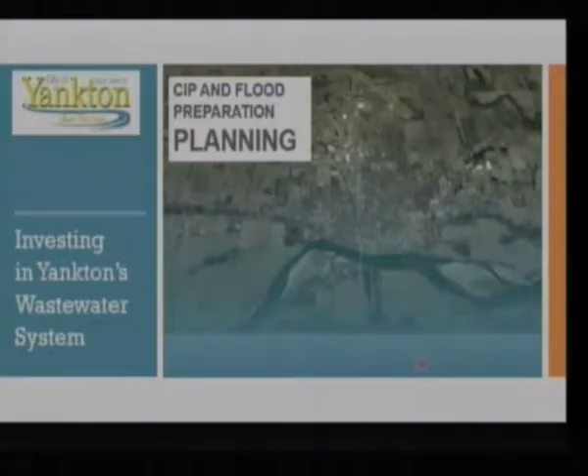Just a little bit about what the condition assessment was, the overview, the process, and some of our findings and recommendations. Again, we're not fully done with the condition assessment yet. We're still working through that. But we moved into more of a preliminary engineering phase for the EDA application.

Key staff, myself, we also have Tanner Hansen here tonight. Then with HDR, we have Nick Van Wy here. And then Delron Peters and Dan Graber have been the main two working with us on the process and going through the condition assessment. The other engineers are specific to certain areas, whether it's electrical and structural and things like that.

Key issues that we've been seeing at the wastewater plant, the main one is aging infrastructure and declining reliability with our system. We did make it through the March flood fairly well. We didn't have a lot of damage, but it did open our eyes to a lot of areas where we need to make some improvements.

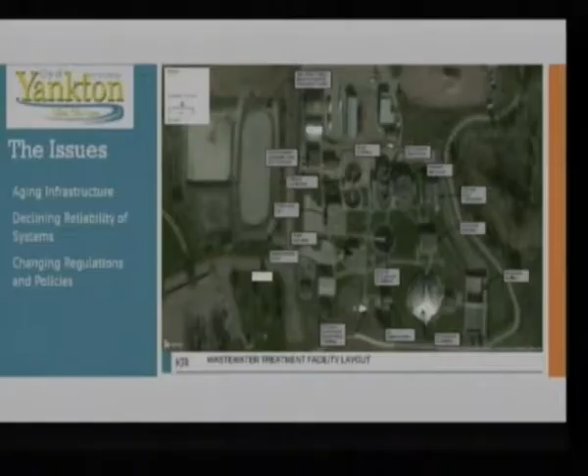And also, anytime you're looking at improvements, you're looking at those future regulations and policies that'll be coming down in the future. The process is evaluate our goals, objectives, evaluate the information, set some priorities, look at alternatives and options, and really come up with a plan.

And that's kind of where we're at in the process right now. We've gotten the basic information. Now we're starting to put together a plan.

When you look at prioritizing issues, the biggest one is what keeps Tanner up at night. I sleep just fine because I know I've got Tanner to answer his phone. But that's what keeps the guys up at night, and those issues that are always in the back of our mind. And performance, we're always looking at ways that we can optimize our performance to save money in the long term.

Being proactive, maintaining a good maintenance program so that these facilities are resilient. And one of the things we're seeing more of, as people retire and take a lot of this information with them, we need to do a better job of planning and getting that information documented and developing some standard operating procedures to deal with them in the future.

What's really driving these capital improvements? Again, the regulatory requirements are always in the back of our mind. Flows, loads, capacity, looking at where our system is in terms of capacity. And then the facility's age and condition, and that's still the biggest one.

Process equipment is probably the biggest one where we're having some issues. We do have some structural issues with a few of the buildings. We have some electrical issues that we think we can add some resiliency to our system. And of course, we're always looking at safety issues.

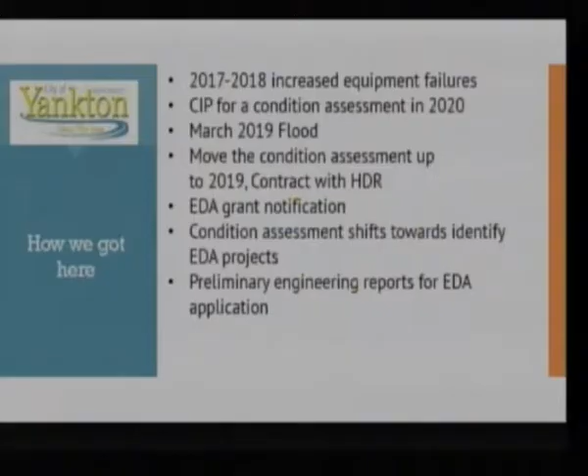Main reason was to address some of the issues we had at the plant and to be ready for the future funding options that were going to come out, mainly the EDA. Here probably a couple months ago, we got notification of that EDA grant. And then when that came out, our condition assessment really shifted towards identifying EDA projects.

What came out of that then is preliminary engineering reports to be put into the EDA application. The application for the EDA is really looking at projects that add resiliency to your system, so that when natural disasters hit, your system can withstand those, handle those, and you don't have as many issues. So that's kind of where we got to today, and that led into the projects here. We've got about 16 projects that we're looking at right now.

First one here is to replace the electrical main gear. This is basically our electrical gear that switches during our power switches. So if we lose power to the plant, the electrical gear has to switch over to the secondary power supply. We've had some issues with this. We had a brownout one time because the transfer switch did not work properly. A brownout is when you lose basically one phase of your power, and that causes more damage within the plant. This, I believe, was originally installed in 2000. The switchgear is actually from 1980, so again it's beyond its lifespan, and we're looking at some options to improve that. We've got an estimated project cost of about $700,000. Again, these are preliminary costs from preliminary engineering reports, so we'll continue to update those as we move forward with EDA.

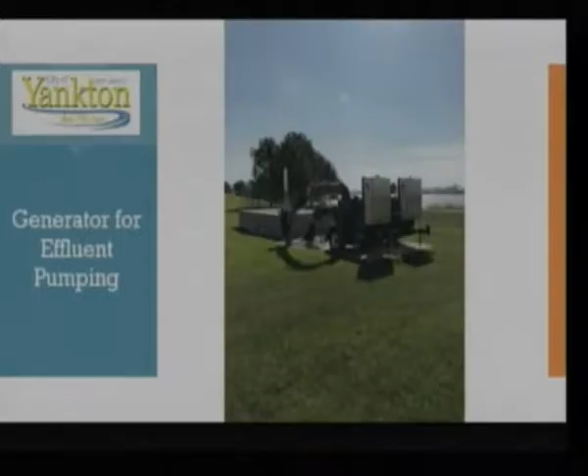Next one, if you remember, on our last EDA project we put in some effluent pumps. For several years we've had a generator in the budget. We haven't purchased it, it's always one of those things that gets pushed. Through this, we'll apply for a generator to power these pumps. If we were to lose both power supplies to the plant, this would allow us to run a generator to pump the flow away from the facility and prevent damage to the main infrastructure in the plant. The generator would also be able to be used at other locations, including the booster stations and Nebraska wells. Again, estimated project cost of roughly $521,000.

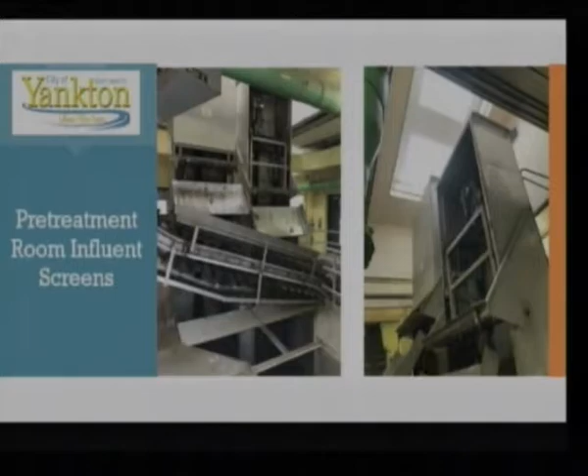Pre-treatment room influent screens. This is the screening mechanism for the initial flow into the facility. We've had a lot of issues with our pre-treatment building, so we're looking at making some improvements to that. It's one of the first things that showed up on the condition assessment in terms of needing repairs. The cost for improving that screening system is about $530,000.

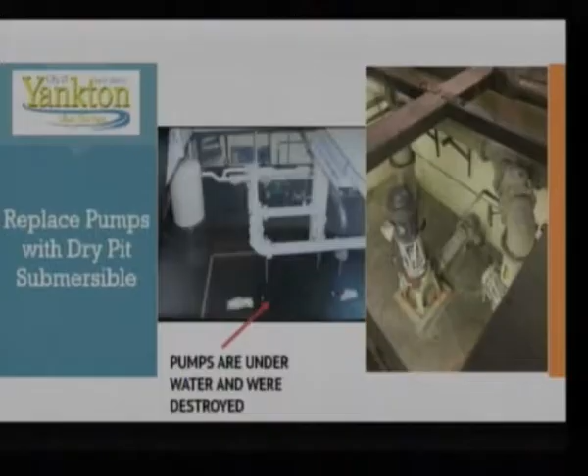What we're looking at is replacing those pumps. Again, they're 20 years old, they're at their life expectancy, with what they call a dry pit submersible. It's a pump that's designed to be underwater. It'll run in a dry pit, but it could actually run submerged underwater. So if we lose that facility again and have that flooding, we don't lose the motor. You simply get it pumped out, flip it back on, and it runs. So it adds a lot of resiliency to your system, and you're not down near as long as you would be with our current infrastructure. Again, estimated cost to replace those 3 pumps, including removing some of the electrical that's down below and moving it up to an upper level so it won't be flooded, is around $456,000.

This is kind of a newer one for Tanner and I, the electronic operation and maintenance manual. Currently, we do everything through Excel files for recording our maintenance and operations. This will really be the first step in getting our plant into an asset management style system. It gives us a better way to track our maintenance, track our costs, and determine where we're spending money in maintenance and operations and where we can save that money.

That's looking around $250,000. This one, like I said, is a little bit newer to Tanner and I. We haven't had a lot of discussion with HDR, but it's definitely one that we're interested in.

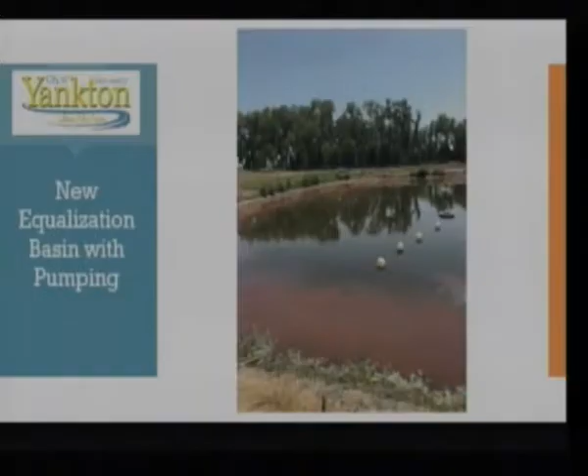New equalization basin with pumping. Right now, when we hit our peak demand, we basically have to force the water through the system, and it overloads us hydraulically and causes us issues. What we're looking at is basically adding a basin out in Paddle Wheel Point, in the same area as our sludge lagoons. What this allows us to do is basically have roughly 1 million gallons of empty space to divert water to during these major events.

This last event, I'm not sure if that would have been enough, because we figured we bypassed roughly 3 million gallons during that event. But for a lot of events, we would be able to equalize, send some of that flow over to our equalization basin, and then bring it back at a later time.

It also helps during our day-to-day operation. Currently, right now, we have real high peaks during the day and real lows at night. So on a daily basis, we could actually send some of our flow during our peak hours over to the equalization basin and then bring it back through the night. When you're working with a biological system, the more even keel you can keep everything, the better it is for the bug life, and the better your system works.

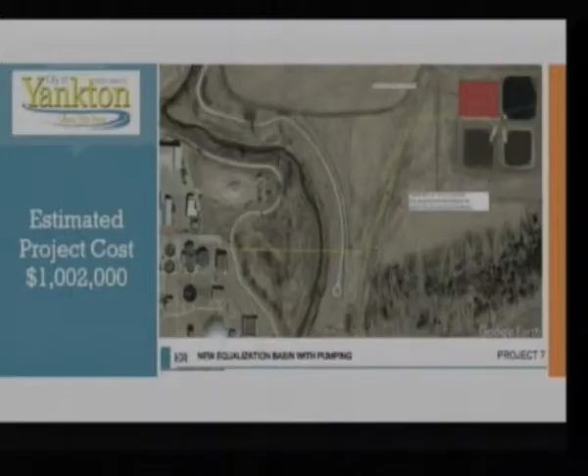Roughly $1 million. We looked at potentially using the area where the lime lagoons were at, but decided it'd probably be better to move it over towards Paddle Wheel Point. Adds some cost, but in the long run, I think that's a better location for it.

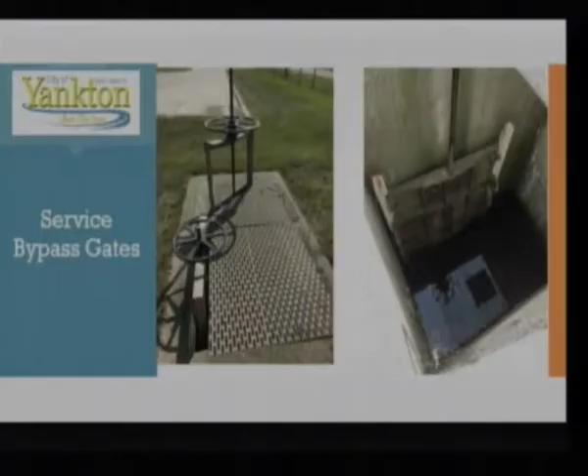Service bypass gates. One of the things we realized during this last event is a lot of our bypass systems are not up to where they should be. We've bypassed off the primary treatment several times, but we've learned that our bypassing system right at the Influent building isn't really operational.

We need this, again, for events, but we also need it as we move into doing some projects within the facility when you're going to be taking buildings out of commission to do repairs and things. We're going to need that ability to bypass. So we want to come in and basically overhaul our bypass system, our bypass gates, and get everything up and working, so as we move into future projects, we'll have that system working properly.

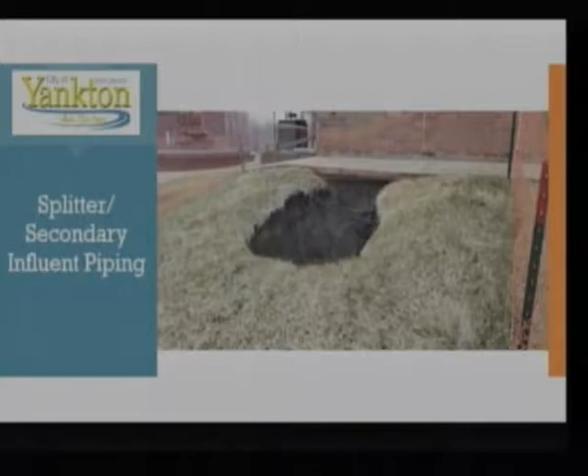We got a preliminary cost of $1.4 million, but this also includes some other issues we found out during the project. As that sinkhole and the material disappeared, it also took all the other pipes that go into that building settled. So all the pipes that are coming into the building now are coming in at really funny angles and are putting a lot of pressure on the piping system within the building.

So when we have it excavated to redo that 36-inch pipe below, we're also going to be doing work on all the other pipes to bring them up so they're level and we're not putting that pressure on the piping on the inside of the building.

So we're also looking at, since we're going to have everything down, all the bypass pumping in place, there's a wet well in the basement there that, since we're going to have it out of service, we'll be doing a new coating in that wet well to prolong its life. Again, some of this project may be FEMA, some of it may not, we're not sure yet.

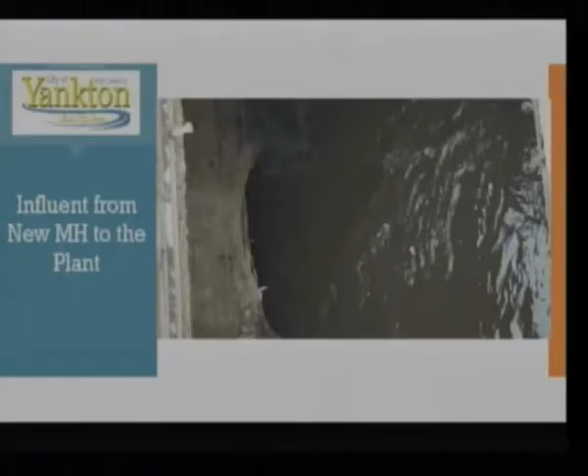This is the influent pipe from the new manhole to the plant. If you remember, during the force main project, we installed a new manhole by the street shop. A year later, we had a failure in the manhole on 2nd Street, up in the intersection. We replaced that manhole with 2 new manholes and piping out into 2nd Street.

This again is an arched concrete pipe that we've had failures on in the past, with the manholes too. So part of this project, we'd replace the pipe going from just north of the street shop all the way down to the inlet building at the wastewater facility. That's kind of where we're at with that one. Estimated cost of $1 million. Again, it's a project that will add to that resiliency for the future.

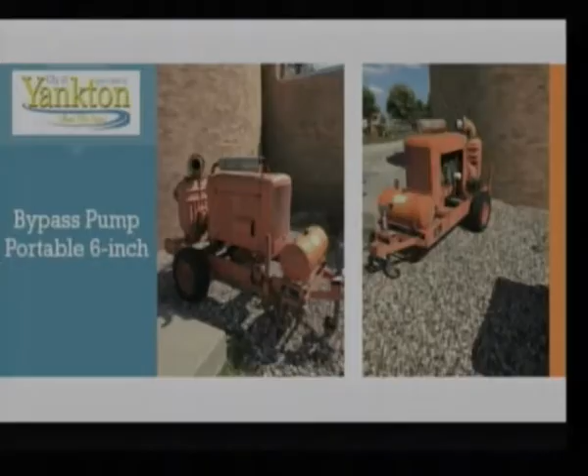Our bypass pump, this is something we're going to put in. As you can see, it's an older piece of equipment. It worked very well the night of the flood. Tanner uses it quite a bit in his operation for moving material around from different solids, lagoons, and things like that, or if we have to take down a primary clarifier, this is the pump we use to pump it down. Again, it's just aged, past beyond its life expectancy, so we'll look at replacing that.

$84,700 is, again, a preliminary cost that we have on that.

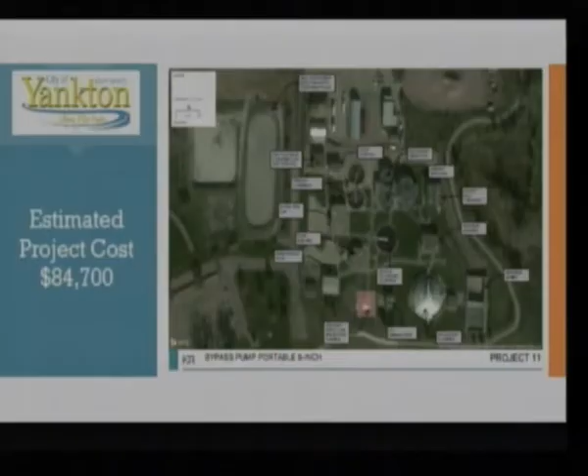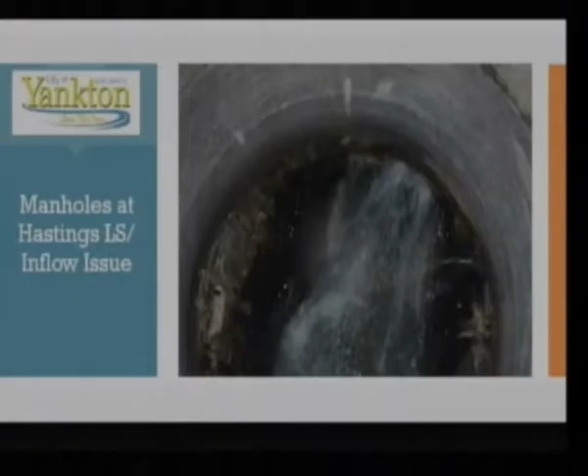Manholes. During the event, we had a lot of inflow into our manholes. We've got some areas where we know these manholes are in ditches, especially out by the Hastings area and around Bill Baggs Road. They're lower manholes, and they get covered with water during events. We need to go and rehab those manholes and make them watertight so we don't get as much infiltration. Controlling the infiltration, keeping the water out of our wastewater system, will keep it from having to be treated at the facility and pumped through our lift stations. Estimated cost of $20,000 - not a real expensive project, but a very important one.

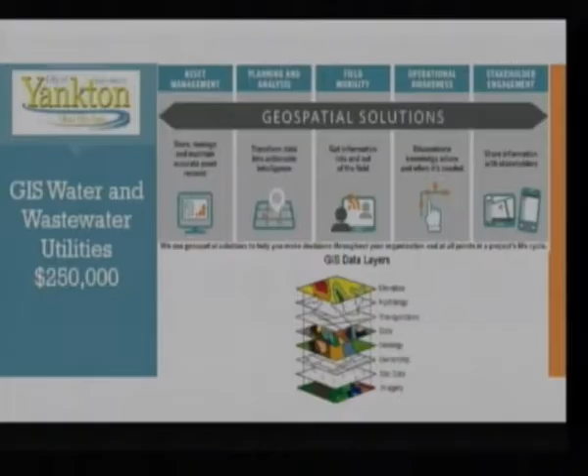Now we get into some of our planning documents. As part of this too, as the EDA application, planning documents are something we're eligible for cost on. We've been talking about the GIS water and wastewater mapping for a few years now, but we've struggled to get the manpower to get it done. This would give us an option to hire somebody to come in and shoot in all the manholes, all the piping, all the water distribution valves, fire hydrants, and everything. Estimated cost $250,000. This has kind of been in the budget, and we just haven't gotten to it yet, so we'd like to move forward with that. It's also very important in terms of getting our master planning done.

The next step, as we move forward with this condition assessment, is we'll complete the condition assessment, which is still probably a few months out. We're pushing now into preparing for an EDA application. The following step after that will be the master plan itself, which will take it to the next level and begin to prioritize projects that are out in farther years, identifying a direction - whether this is a larger project or a bunch of smaller projects - and how we're going to move forward with those.

And then the next big one will be the wastewater collection system master planning. The wastewater master planning in the collection system is a little more complicated than on the water side. The first part of this would be a lot of modeling, following the GIS work. The tough part about wastewater is it's very hard to predict what you're going to have.

On the water side, you can shut a valve and see how your system reacts. You really don't have that ability in wastewater. You really have to wait for the next event to see how your system reacts and make sure your model works. So you spend a lot of time collecting data - you put samplers in your system, collect your flow data, develop a model. Then based off that model, you have to go back and calibrate it to make sure it really does what the system shows. And you need those infiltration events to see if your model is really working and how much it needs to be calibrated.

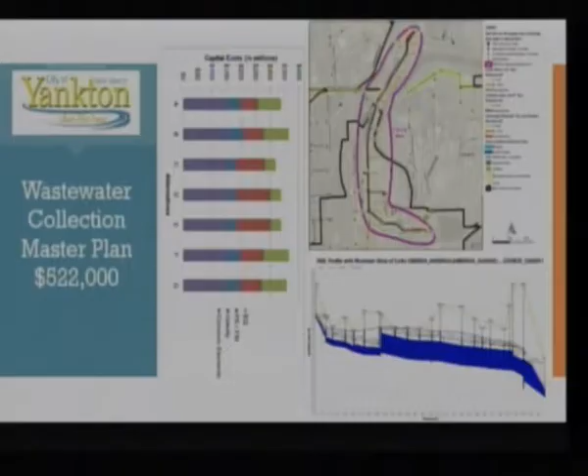One option is to go in and try to reduce that infiltration. The other option is to leave it alone and just treat it at the wastewater plant. And it's going to be a really hard decision for us, because is it going to stay this wet? Are we going to continue to have these infiltration problems that we haven't had in the past? Or are we going to go back to normal where it's not an issue? So that'll be something we'll have to look at past data, look at what we're predicting for the future, and really see how much money we want to put into the collection system to try to prevent that infiltration.

And it's not going to be an easy answer, and it's not easy to get that data collected. So it'll be time consuming and expensive. So that's where we get to the $522,000 for the collection system master plan, which includes the modeling and all of that.

We also added in the water distribution system modeling. It doesn't really fit into the rest of the wastewater stuff, but the reason we added it as an EDA project is one of the things we've noticed through this is with the pipe being out of service, next to the chamber there, a 12-inch main. We really didn't have a way of predicting how that's affecting our service.

It's caused us some issues in other portions of town with a lot of discoloration in the water. We're getting a lot of iron in the water. And we think that's because it's changed the flow of the water, or it's forcing more water through pipes that we normally didn't have that high flow.

So we don't have a good way of seeing that and predicting how that affects us, which means we really don't have a good way of understanding what pipes are critical to our distribution system.

With the modeling, we can evaluate that and see, especially on the creek crossings, so that when we have this event again, we understand which pipes are critical, which ones maybe are not critical, which ones are valved properly, valves on each side of the creek where we can shut the crossing off and not have people out of service, or do we need to add valves so that we have that capability?